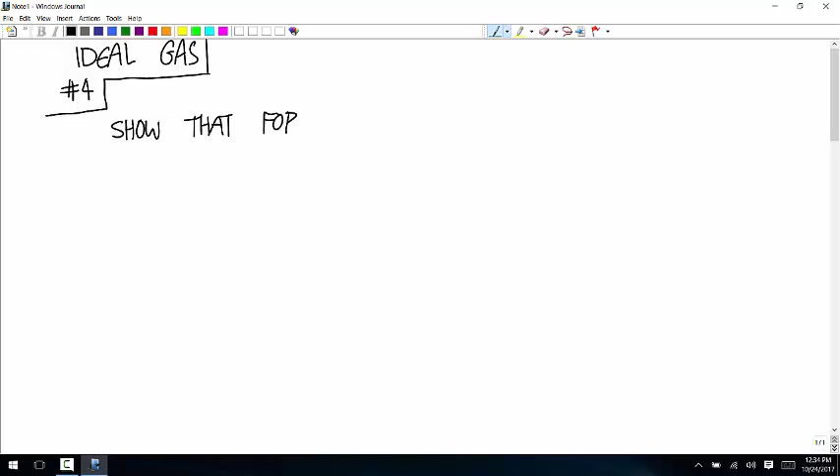Show that for an ideal gas, CP over CV is 5/3. And then how does that compare for an incompressible material? Well, for an incompressible material, they're the same, so that ratio would be 1.

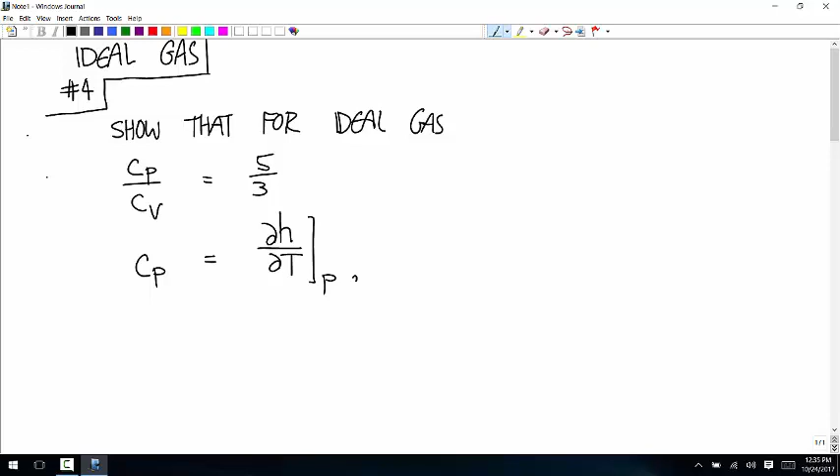Okay, so for this one, what do we have? CP is equal to the partial of the enthalpy with respect to temperature, holding pressure constant. Is that right? CP, yeah. And CV is dU/dT holding volume constant.

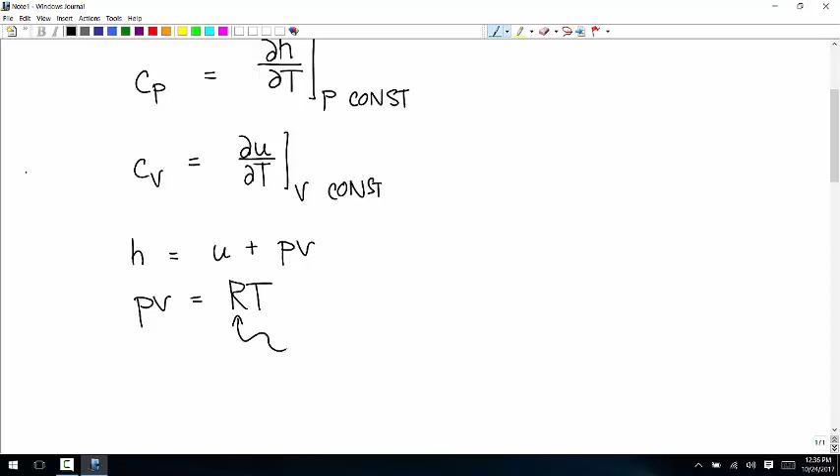H is equal to internal energy plus P times specific volume. And we know it's an ideal gas, so PV equals RT, where this R is specific to the gas, not the universal one.

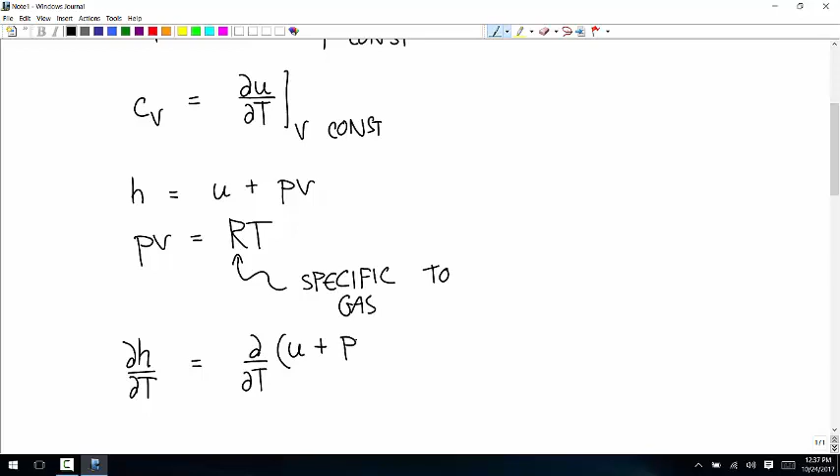Okay, so U... let's think of... so dH/dT is equal to the partial with respect to temperature of U plus PV, this is for pressure constant.

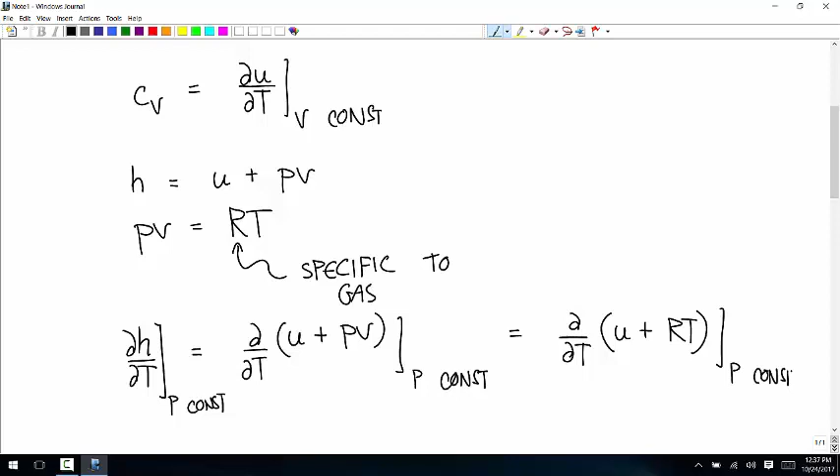From the ideal gas law, PV is equal to RT, so we can write that as the partial with respect to temperature of U plus RT, holding pressure constant. That's equal to the partial of U with respect to temperature for P constant, plus R.

For the ideal gas model, the assumption is that internal energy is only a function of temperature, is that right? Can someone check? I don't know if I have that with me here. Yeah, internal energy is a function of temperature.

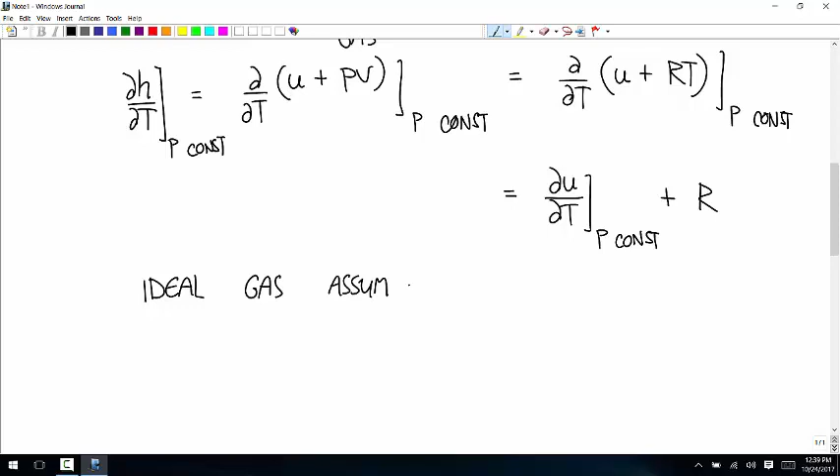Okay, so here are the ideal gas assumptions. First, PV equals RT. Second, specific internal energy is just a function of temperature. And third, H can be approximated as internal energy, which is a function of temperature, plus RT.

Okay, well that was sort of what we were getting at there. Using the fact that U is just a function of temperature, then we don't have to worry about holding pressure constant versus holding volume constant, since it's not a function of those. So this tells us that...

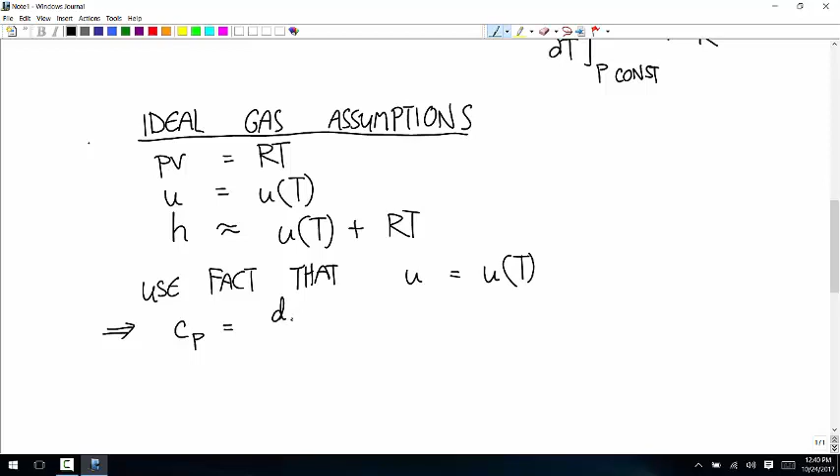Cp is just equal to the total derivative of H with respect to temperature. This is a restart, by the way, I don't know if you could tell that. These are notes to self, only. Okay.

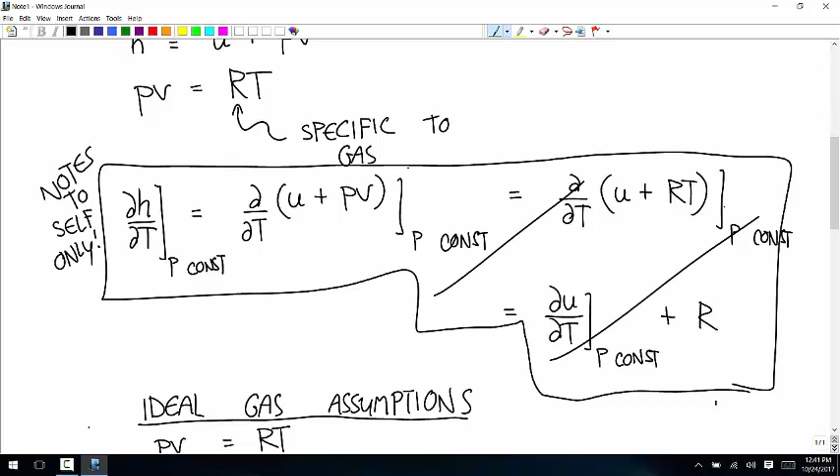So Cp is this, and Cv is the total derivative of U with respect to temperature. This is the total derivative with respect to temperature of H, equal to U plus RT. So take that derivative and you get dU/dT plus R.

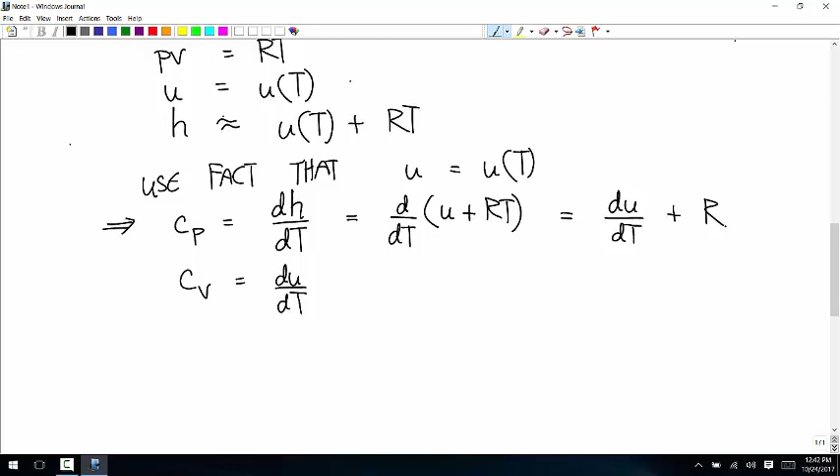And we're looking for Cp over Cv. So we have dU/dT plus R, divided by dU/dT, and that gives us 1 plus R over dU/dT, which is Cv. So we got this, and that's also equal to this.

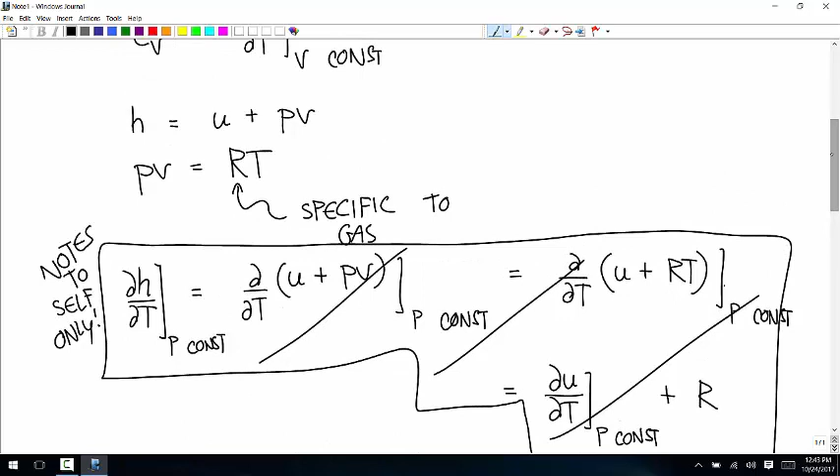Okay, so we want to figure out that R over Cv, or R over dU/dT, is equal to 2/5. Anybody remember how to do this? So let's see, R is equal to PV over T.

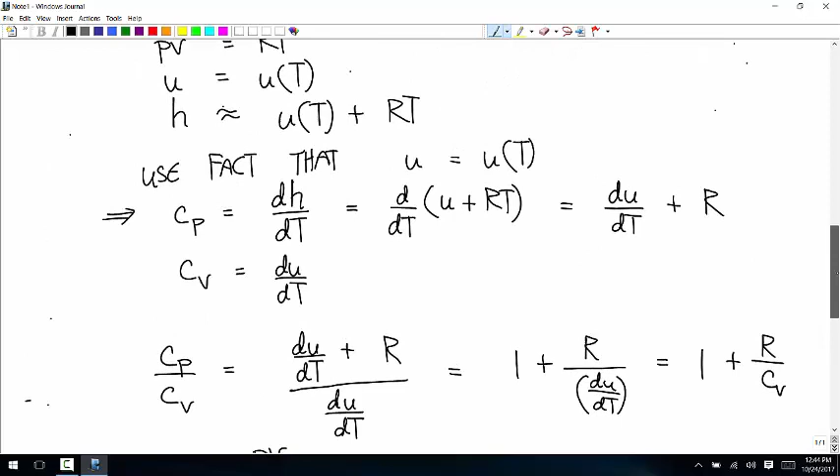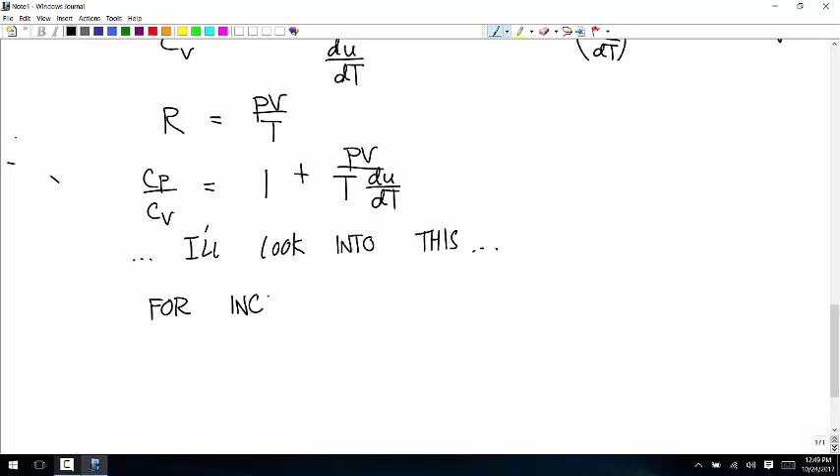So we have 1 plus PV over T, dU/dT. But it definitely did say that for an incompressible material, a liquid or solid you're treating as incompressible, Cp is just equal to Cv, and we just call it the specific heat.

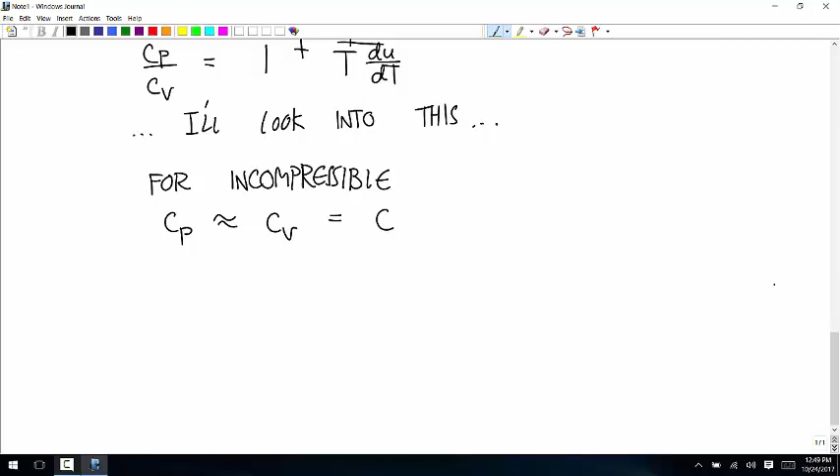All right, so what we've been talking about is control volume stuff, the first law of thermodynamics for control volumes.

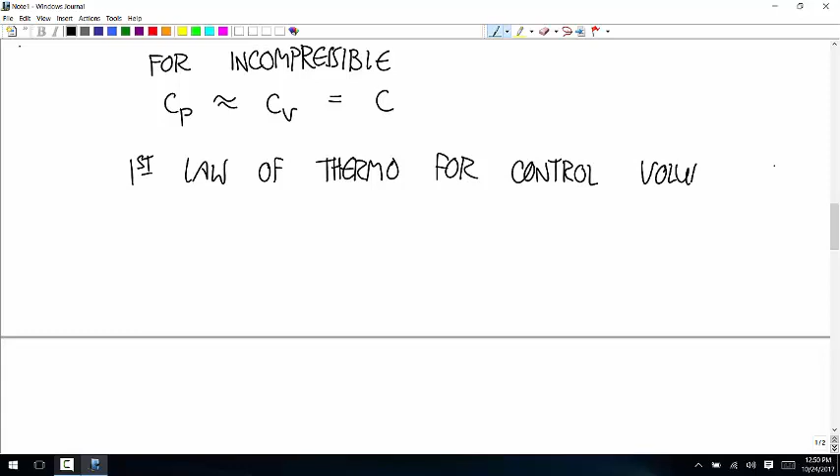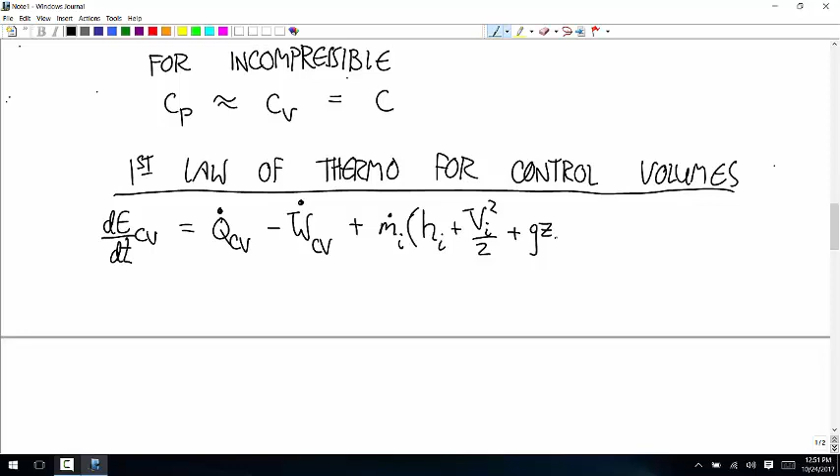The full general equation says the change in the energy of a material in the control volume is equal to the rate that heat enters the control volume, minus the work done on the surroundings by the control volume, plus the rate of mass flow through the inlet times the quantity enthalpy at the inlet plus speed squared over 2 at the inlet plus G times height at the inlet, minus the rate of mass flow at the exit times the quantity enthalpy at the exit plus speed at the exit squared over 2 plus GZ at the exit.

And then depending on what kind of device or control volume you're looking at, you eliminate some of these. So the first thing we talked about was nozzles and diffusers.

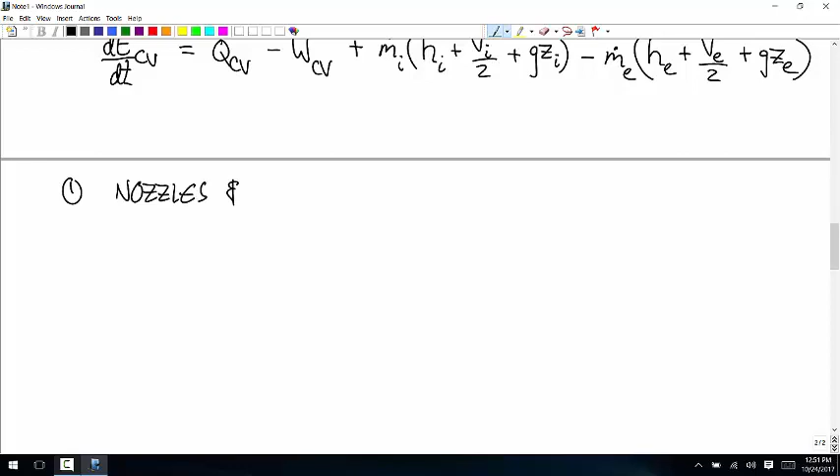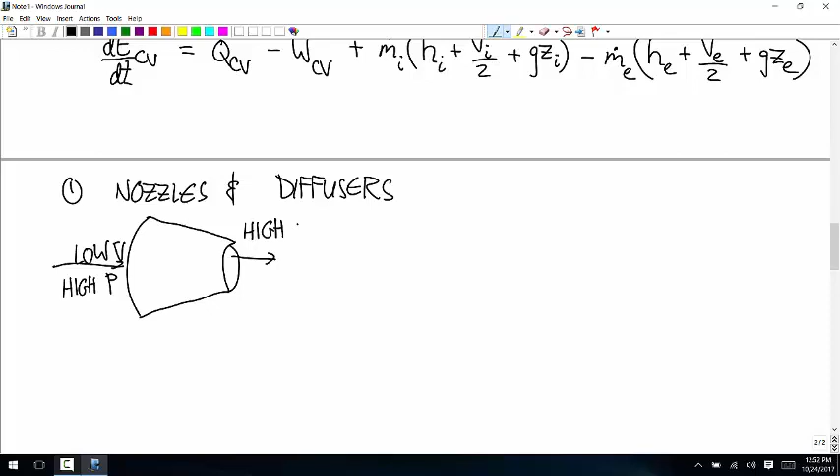A nozzle speeds up the flow and decreases the pressure. So at the inlet you have low speed and high pressure, and at the outlet you have high speed and low pressure. A diffuser is the opposite: at the inlet you have high speed and low pressure, at the outlet you have low speed and high pressure.

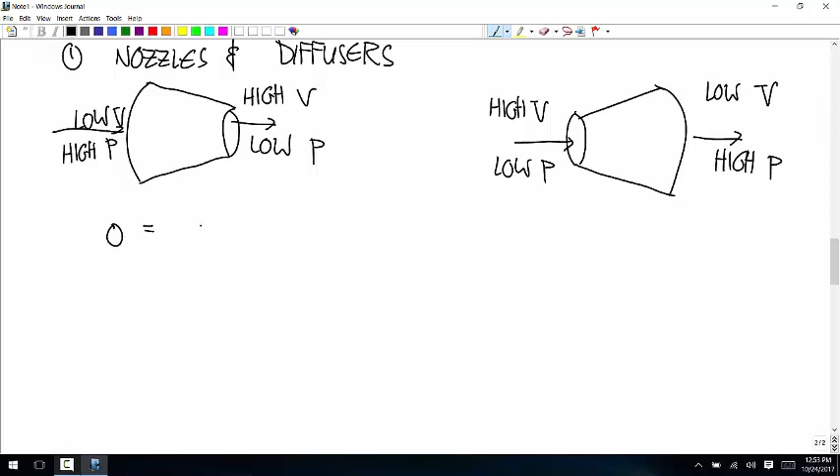And the simplified form for that one said, you can write it a couple of ways: zero is equal to the enthalpy at position 1, or the inlet, minus the enthalpy at the exit, plus the speed at the inlet squared over 2, minus the speed at the exit squared over 2. So you can think of nozzles and diffusers as exchanging enthalpy for speed and pressure.

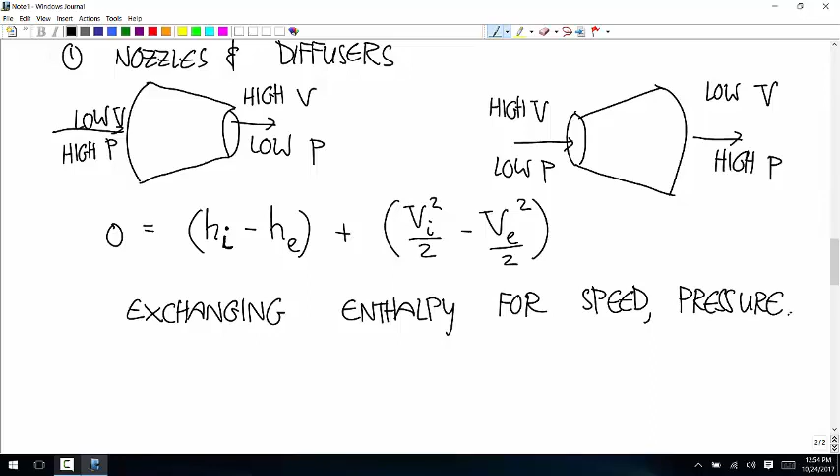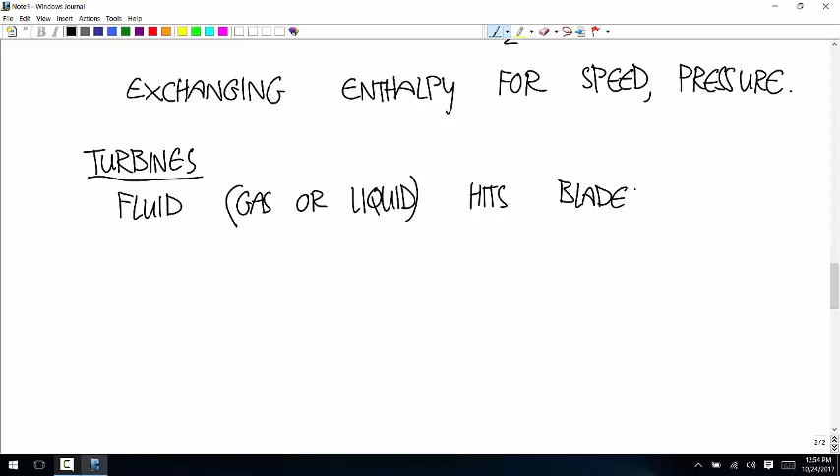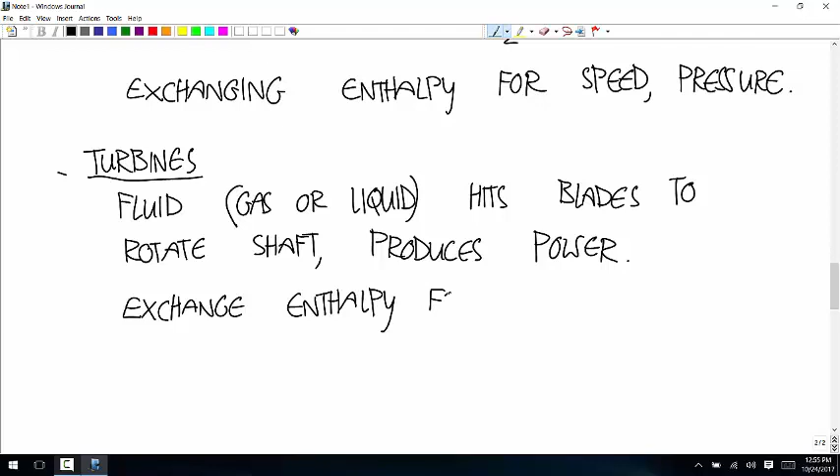So the next one, we did an example last time with that. The next one is turbines. In a turbine, a fluid, a gas or a liquid, hits blades to rotate a shaft, and that produces power. You could use it to do physical work, or more often it's used to produce electrical work through a magnetic field, and that rotating thing produces electricity. The idea here is that you exchange enthalpy for electric power, or it could be mechanical power.

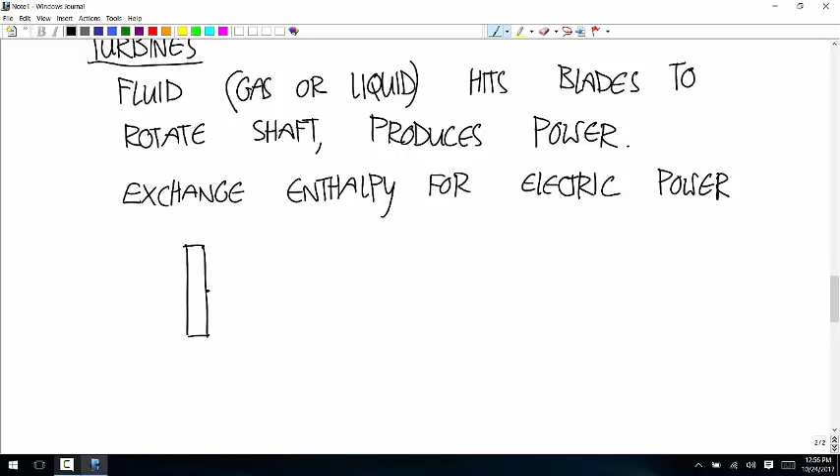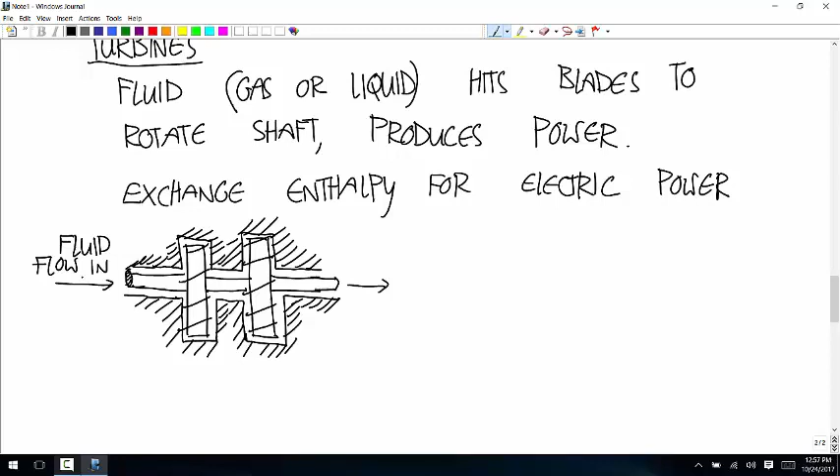So let's think about the simplifications here. Here's a drawing of what it might look like. So you have a shaft. In this case, we have 2 turbine blades. Here are the blades. These are inside a tunnel. This is a solid shaft. All of this shaded region is solid. You have a flow of steam or whatever material this way, and it leaves this way. When that fluid hits these blades, it turns that shaft, and that's how the power is created.

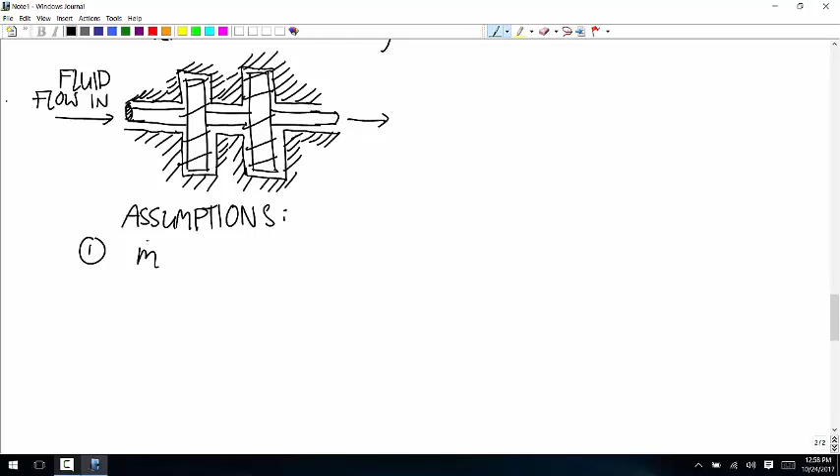So here are the assumptions that we're usually going to make with turbines. First, there's no material stored in our control volume, so whatever the mass flow is coming in is the same as the mass flow going out. In other words, the rate of mass flow at the inlet is equal to the rate of mass flow at the exit, and we'll just call that m dot. Second, steady state, so the rate of change of energy in the control volume is 0.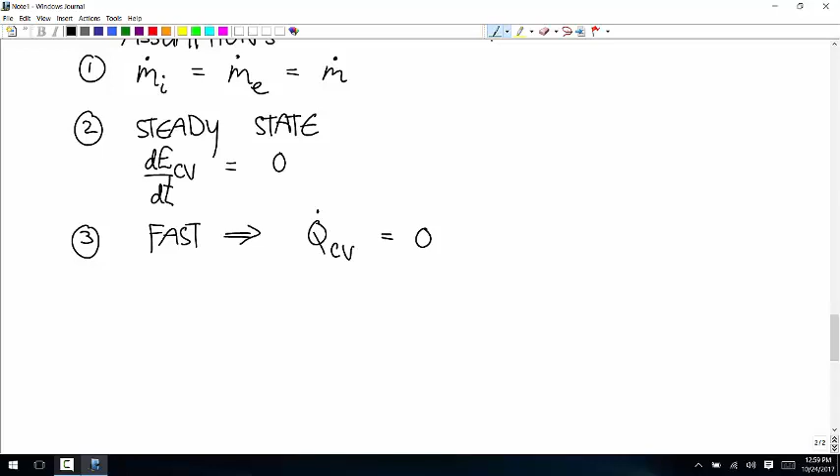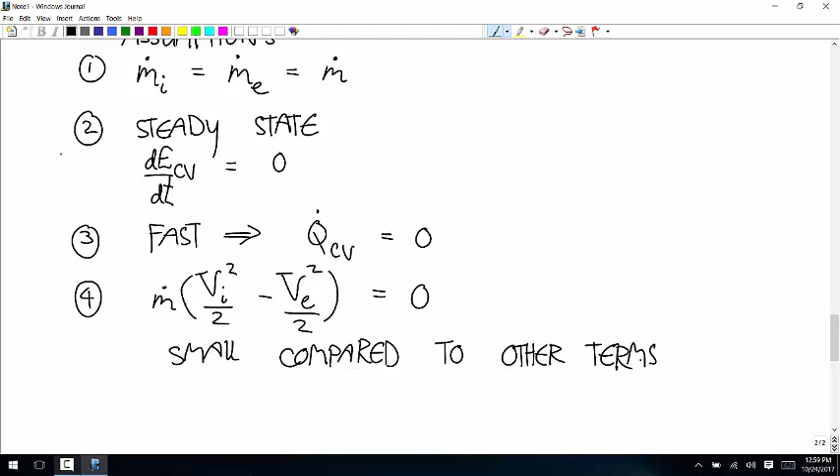Fluid, usually to turn these blades, needs to move through the control volume pretty quickly, so we're usually going to assume that there's no heat transfer from the control volume to the surroundings. This one is a little surprising, but we're going to do an example that shows a typical case of how this works. The kinetic energy contribution to the first law of thermodynamics is small, so that term is treated as 0 - it's always going to be small compared to the other terms. And then also the change in height of the fluid is not going to contribute much to this, so we'll assume that m dot times the quantity gz at the inlet minus gz at the exit is equal to 0, again small compared to the other terms.

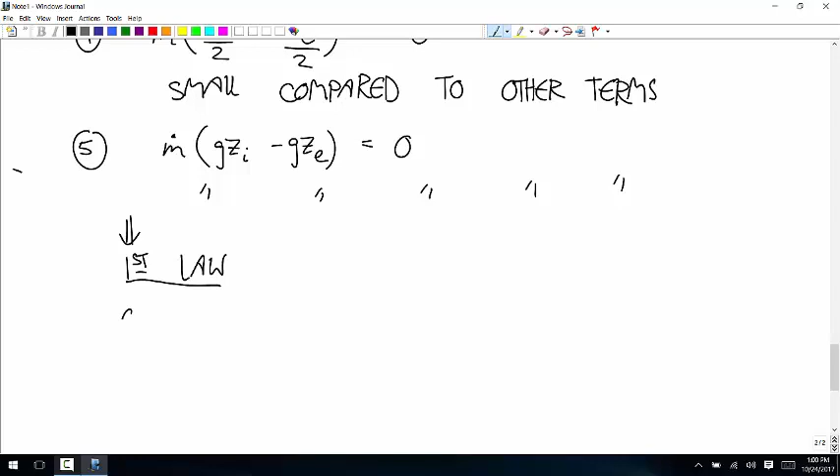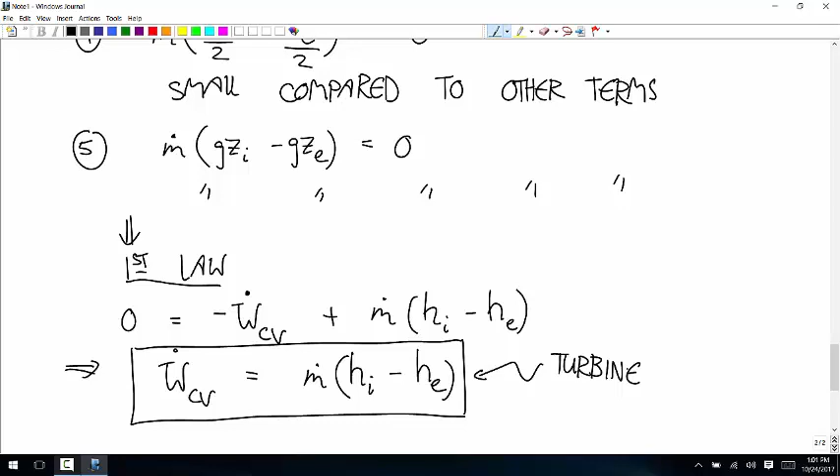And so the first law with these assumptions says 0 is equal to negative of the work done on the surroundings by the control volume plus m dot times the quantity enthalpy at the inlet minus enthalpy at the exit. You can rewrite it as the work done by the material in the control volume is equal to m dot times enthalpy at the inlet minus enthalpy at the exit. So this is for a turbine: that W dot is the work that is given away by the control volume through electric power, that's electric power that's created.

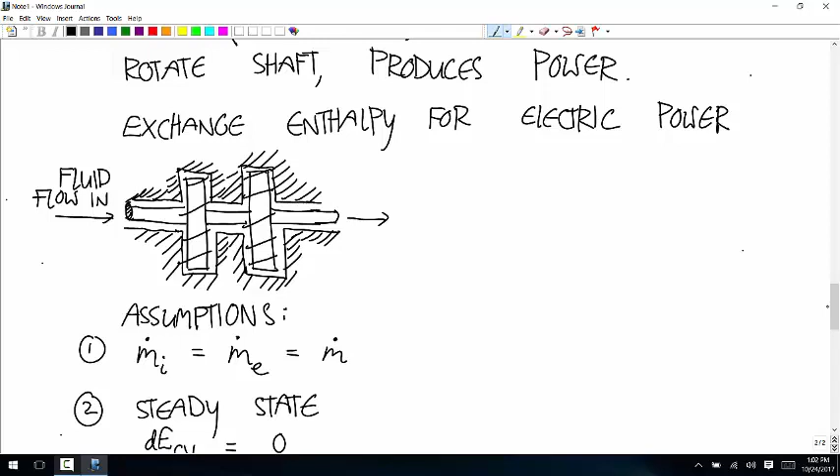So there is going to be a change in speed from one side to the other side normally, and we'll see that in this example. But that change in speed just isn't going to be a very big source of change in energy.

Okay, so let's say that this is a steam turbine, so that means that the material moving through the turbine is steam. The rate of mass flow is 4,600 kilograms per hour.

At the inlet, we know that the pressure is equal to 60 bar. The temperature is 400 degrees Celsius. And the speed is equal to 10 meters per second.

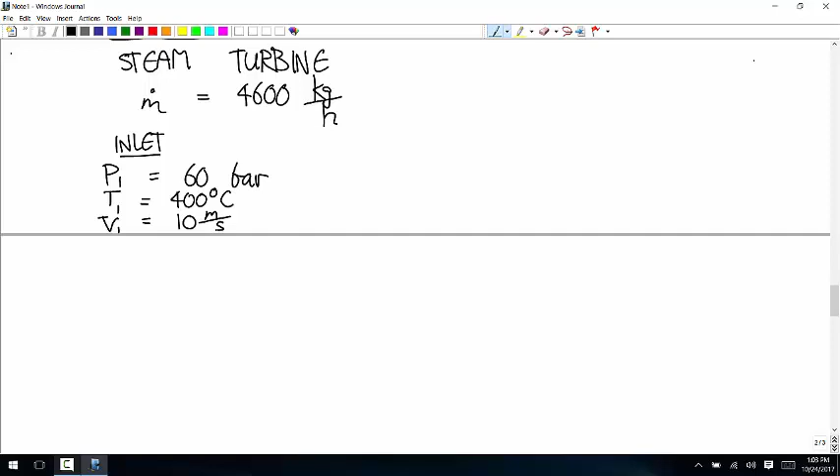And then at the exit, the pressure is 0.1 bar. The speed is 30 meters per second. And the quality of the saturated steam liquid is 0.9. So it's almost all steam, but a little bit of it has condensed into a liquid.

And we want to know, first, using the turbine assumptions, what's the power generated?

And second, now this is sort of a realistic amount of power that you'd actually get out of it. Let's say that we get true power generation of 1,000 kilowatts.

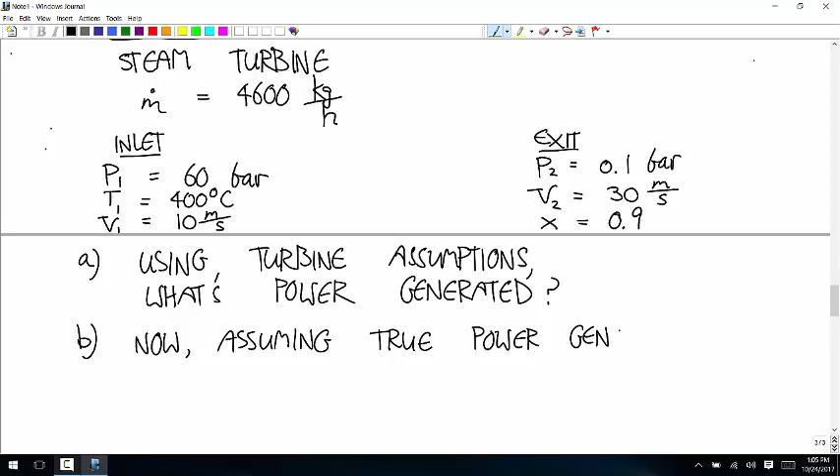What's the rate of energy added to the control volume by kinetic energy?

And then last, with that same assumption, so assuming that true power generation is 1,000 kilowatts, what's the rate of heat loss?

Okay, so for part A, we're going to go to that fully simplified form that we're going to use for turbines. And then for B and C, we're going to go back to a more complete first law of thermodynamics using some of those other values that are given but not used in part A. We'll go back and use those in B and C to figure out how much energy you could expect to lose through heat, and how much you could expect to gain or lose through kinetic energy.

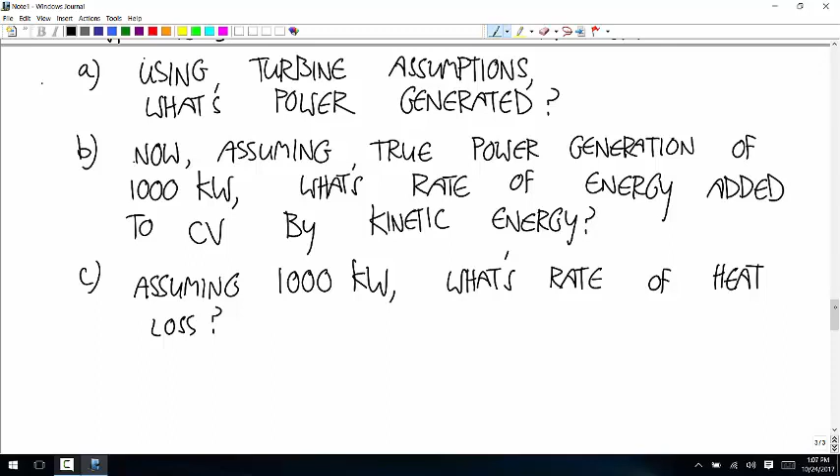What do you think about? Look at the properties at the inlet and the exit. There's a much higher pressure at the inlet than the exit. Do you think that's always the case, or is that just this turbine, or what do you think? We always need it because that difference in pressure is what gets the gas to move in the direction we want through the turbine.

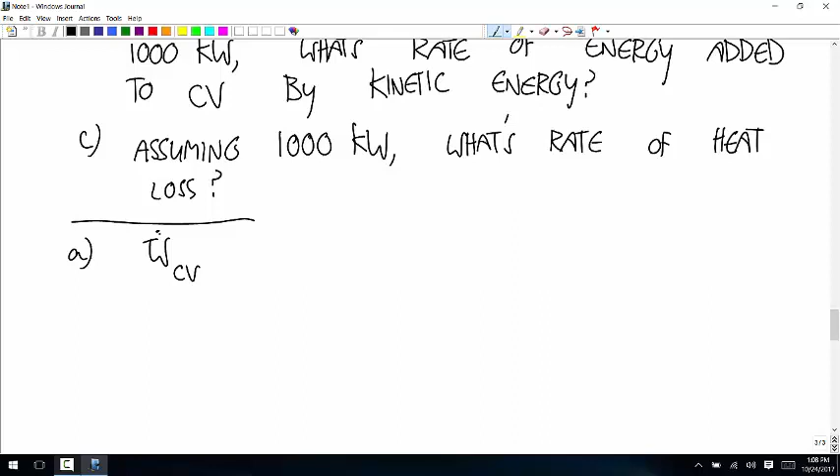Okay, so for part A, we're going to use this equation that says the rate of work done by the control volume is equal to the mass flow rate times the enthalpy at the inlet minus the enthalpy at the exit. We can use the steam table.

And it says that, okay so we know that at P1 of 60 bar and temperature 1 of 400 degrees Celsius, specific enthalpy is 3,177.2 kilojoules per kilogram.

And now for the second, at the exit, we have to use the information about the quality, so it's going to be a little more complicated. At this second pressure of 0.1 bar, okay, so first of all, it doesn't give the temperature. How do we get around the fact that this problem doesn't give the temperature? Or how do we know what to do there?

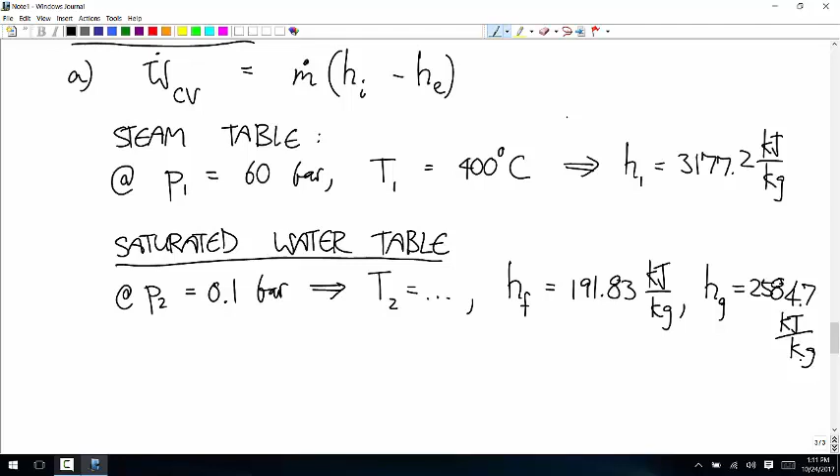So based on that, how do we figure out the enthalpy of the mixture that we have? Well, we have 90% gas, 10% liquid. So H2 is equal to 0.9 times 2584.7 plus the quality, or 1 minus the quality, times the enthalpy for the liquid, 191.83.

And I think that gives you 2345.4.

M dot is 4,600 kilograms per hour. All of our units are in seconds, kilograms, joules. So 4,600 kilograms per hour is equal to 1.27 repeating kilograms per second.

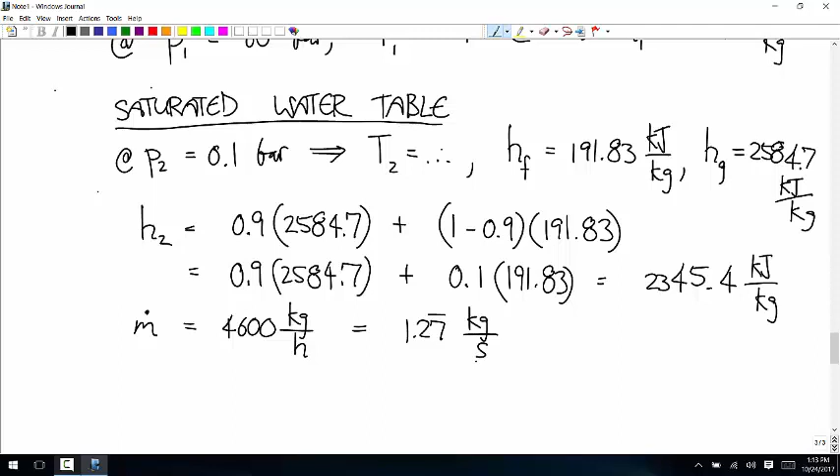Plug this now all into the first law, and you get that W dot for the control volume is equal to 1.27 repeating times the quantity 3177.2 minus 2345.4. And so you get 1,062.9 kilowatts.

Okay, so if there was perfect efficiency, you could transfer all of the change in enthalpy directly into electrical energy. That's how much energy you'd produce.

We didn't use all the values that were given in this problem, so now we're going to go back and use some of those other values to come up with a typical heat loss, and a typical energy loss due to change in kinetic energy, and we'll see how this estimate compares to a more realistic value.

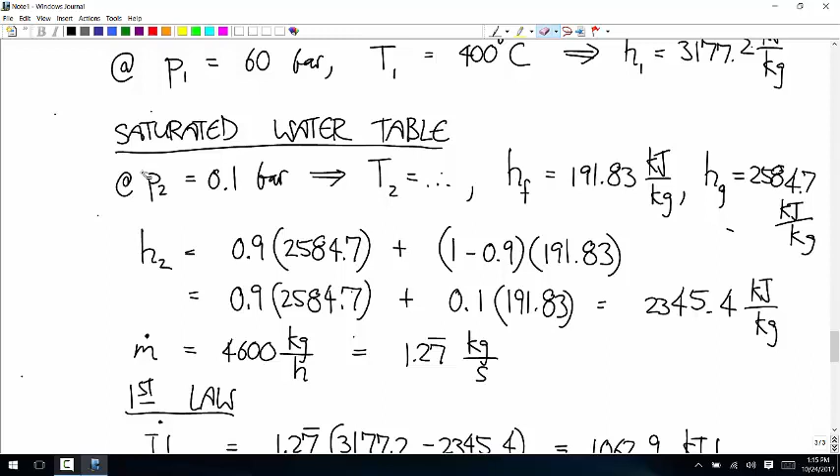Okay, so for part B now, we want to figure out the term m dot times the speed at the inlet squared over 2 minus the speed at the exit squared over 2. So let's figure that out.

We can do that just using the information we're given about the speeds. So using the fact that at the inlet, speed 1 is 10 meters per second, and at the exit, 30 meters per second.

So we know that the rate of mass flow is 1.27 repeating, in kilograms per second. And so m dot times v at the inlet squared over 2 minus v at the exit squared over 2 is equal to 1.27 repeating times 10 squared over 2 minus 30 squared over 2. And you get a value of about negative 508.

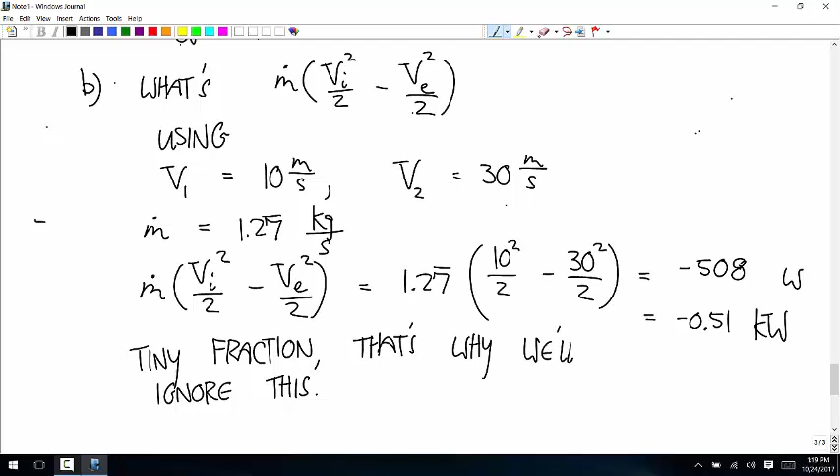And then for C, now we want to, at the same state, figure out what the heat loss would be. We were just calculating the contribution to the first law that comes from changes in kinetic energy.

And so now we're going to go back to the first law. So now what we're trying to find for part C is how much heat is lost, how much energy is lost through heat. Basically, we made the assumption that no energy was lost through heat, no energy was lost through kinetic energy changes, and now we're taking additional hypothetical measurements, but ones supposed to be in the ballpark of something realistic, to figure out how reasonable these assumptions were.

So the first law now becomes, if we're— yes? We haven't needed it yet, but now we're going to need it.

So in part A, we assumed no heat lost, assumed no significant kinetic energy changes, and we calculated using those big assumptions what electrical power would be generated. And now we're saying don't throw those away, and based on some additional measurements, let's figure out the amount of energy that is lost through kinetic energy, the amount of energy that is lost through heat.

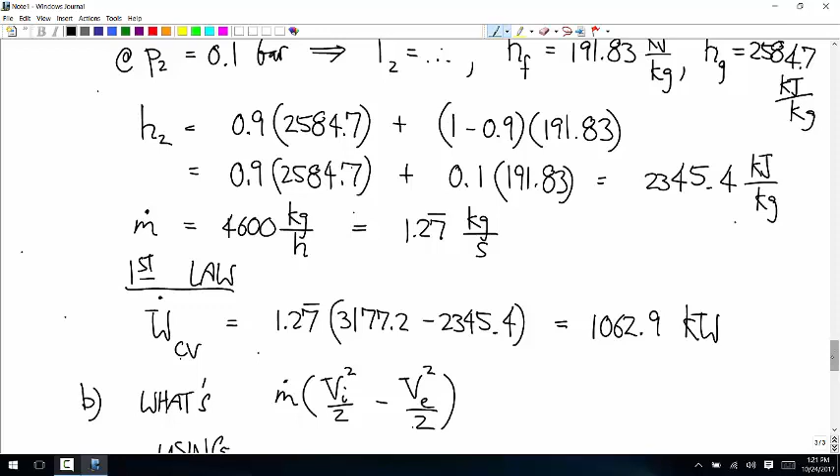Okay, so we calculated here that in part A, the power generation was 1,062. A more realistic amount of power generation for all of these properties would be 1,000. So you lose 62.9 kilowatts. So we're just going to plug all this stuff into the first law and calculate the different parts of it.

So the first law now—we still don't have any change in energy in the control volume. We are dealing with heat now. And now we're making the assumption that the electric power that's produced is 1,000.

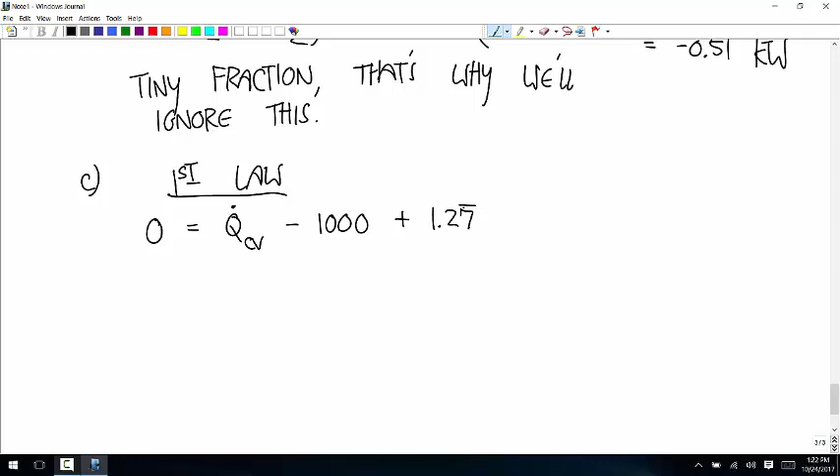So we'll subtract a positive amount of work done on the surroundings. And then we have 1.27 repeating times h at the inlet plus speed at the inlet squared over 2. We're still throwing away the height change. And then minus 1.27 repeating times the h at the exit plus the speed at the exit squared over 2.

So 0 is equal to Q dot in the control volume minus 1,000 plus 1.27 repeating times... we still know those enthalpies from before, nothing's changed about any of the values that we used before. And then we have plus 1.27 repeating times the speed at the inlet squared over 2 minus the speed at the exit squared over 2.

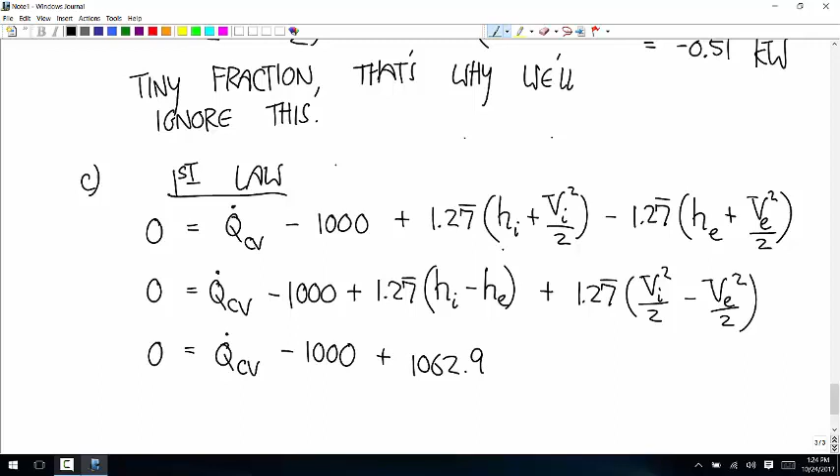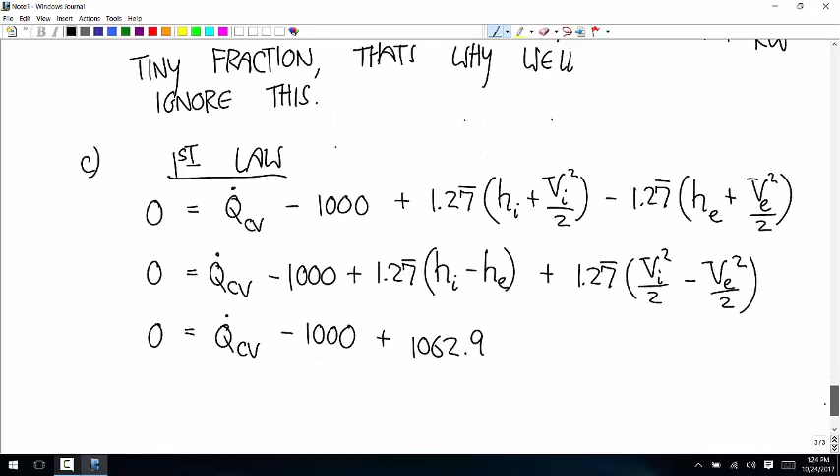And now we can just plug in values. So 0 is equal to Q dot for the control volume minus 1,000. We calculated before that 1.27 times that difference in enthalpies is 1062.9, this is in kilowatts. And we calculated that this term, m dot times the quantity vi squared over 2 minus v exit squared over 2, is negative 0.51.

And so Q for the control volume, Q dot, is equal to 1,000 minus 1062.9 plus 0.51. And what do you get for that? Something negative.

Does it make sense that we would get a negative answer for Q dot? Yeah, because Q or Q dot is positive if heat is being added from the surroundings to the control volume. Here we have heat being lost from the control volume to the surroundings, so that should be negative. Yeah, that's kilowatts. Thanks. Any questions about that?

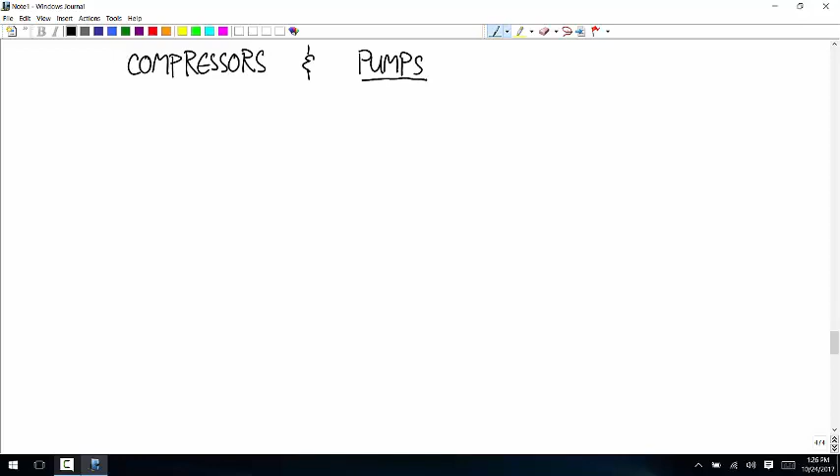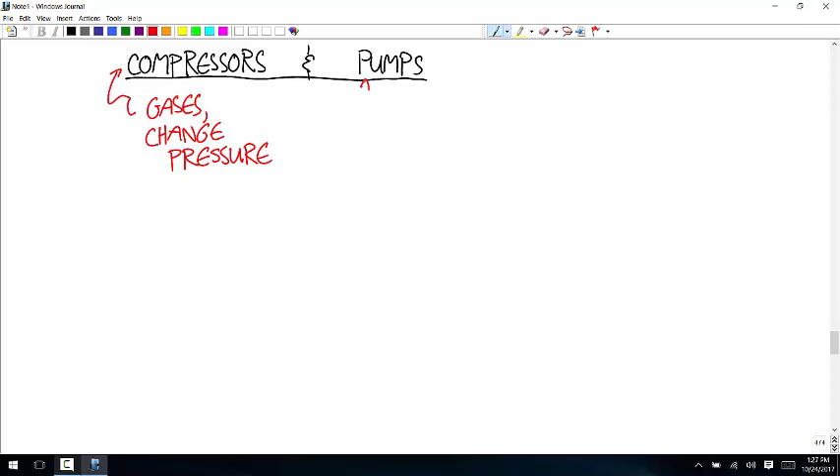Compressors are when you're talking about gases, and what you're trying to do in a compressor is change the pressure. So you always want the pressure to be higher at the exit than it is at the inlet. And a pump is for... you want to, usually you're using pumps to change the height. I guess you could use it to change the pressure.

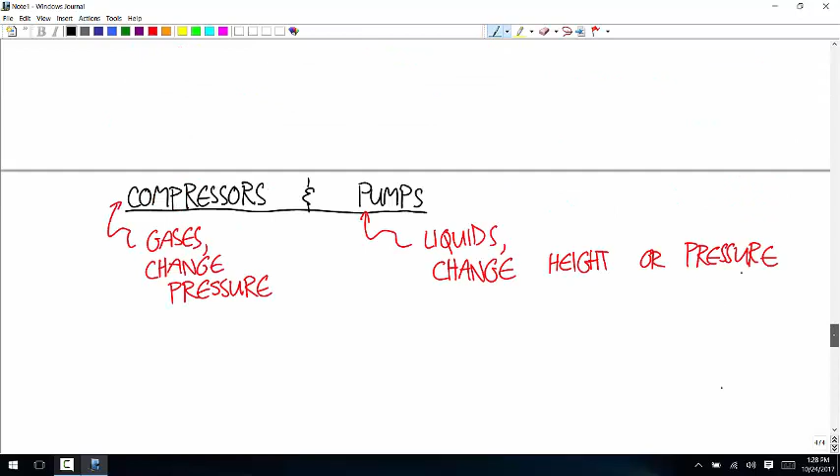And for nozzles and diffusers, we came up with one final simplified equation that related enthalpy change to speed change. And for turbines, we came up with one simplified equation that related enthalpy change to electric energy, change in power generation. For these, every time we use them, we're going to make some different assumptions. There are going to be some that are the same always, so we're not going to come up with a single simplified equation. It's going to be sort of a case-by-case thing.

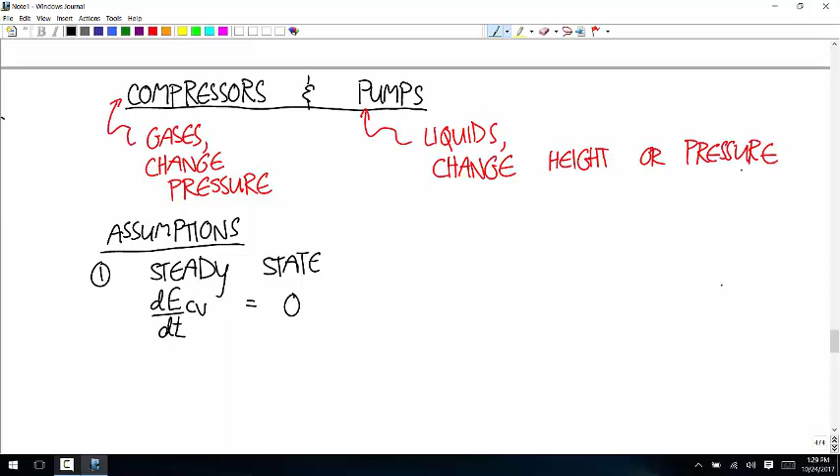So here are the things that we're often going to see, for assumptions. First, it's almost always going to be in steady state. I think probably every problem we do, it's going to be in steady state, so the time derivative of the energy in the control volume is equal to 0. It's moving pretty quickly, so we're usually going to assume that there's no rate of heat transfer between the control volume and the surroundings. Because it's steady state, there's no mass stored inside the control volume, so the rate of mass flow at the inlet is equal to the rate of mass flow at the exit is equal to m dot.

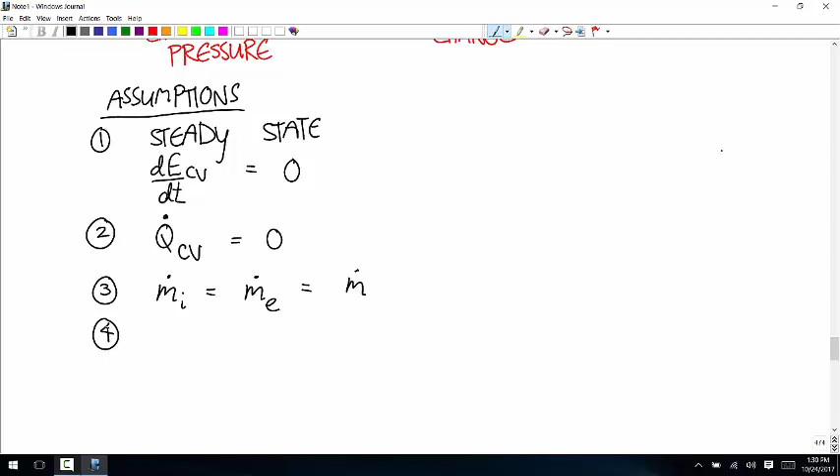And now we get into some that are dependent on the application. For compressors, we can assume that the change in potential energy is small. So m dot times the quantity g z at the inlet minus g z at the exit is equal to 0. With pumps, that's not always the case.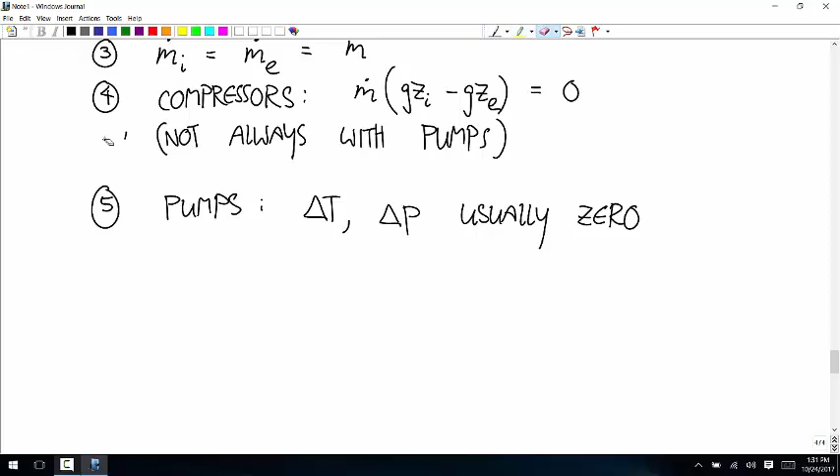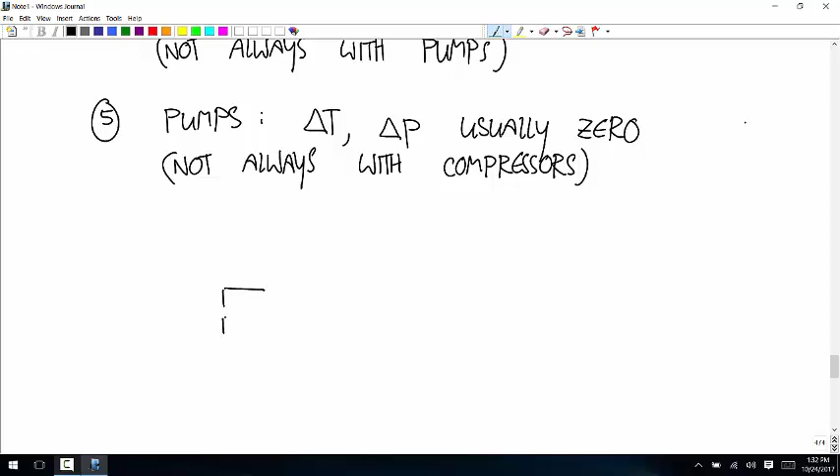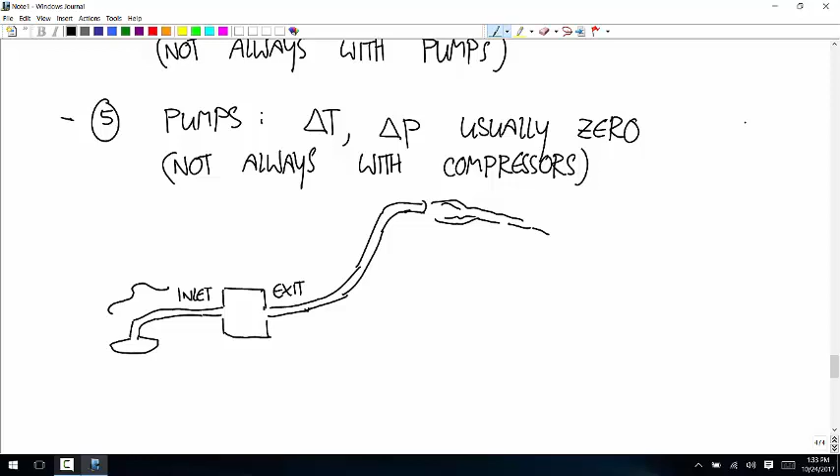So let me elaborate on this one a little. So if you have a pump, here's what the little pump that we use looks like. You've got this thing, it sucks up the water here, and then here's the inlet, here's the exit, and you're trying to get this up to a different height, or you're trying to overcome friction to spray this water out of a hose somewhere far away. Okay, well, when it says for a pump, usually the change in pressure is going to be zero. That seems a little strange if you think about the inlet being here and the exit being here, because obviously you need to develop a high pressure in order to shoot this liquid all the way out there, up high or whatever. But if you think of that control volume as being everything from the start over here, so now think of this as the inlet, and that is the exit.

Right here you have atmospheric pressure. So you're doing all these calculations not really where the physical pump machinery starts, but where you're picking up the liquid and where you're dropping off the liquid. Any questions about that?

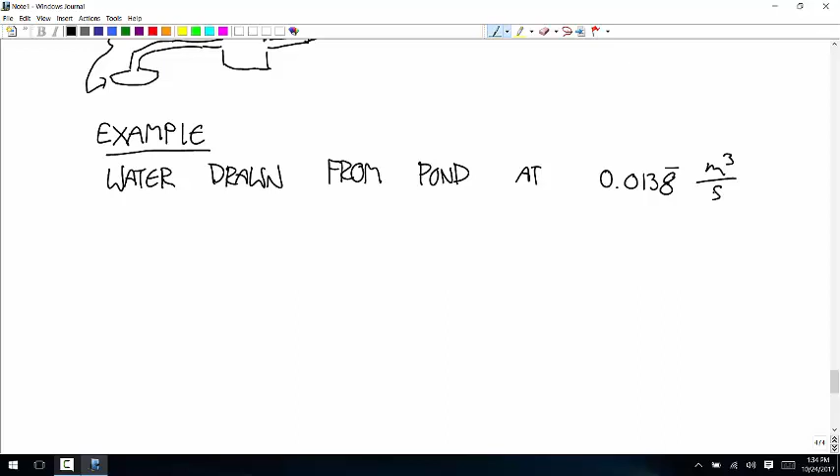Okay, so let's do a problem with a pump. Let's say water is drawn from a pond at a rate of 0.0138 repeating meters cubed per second. Okay, I got that crazy number because I think I converted or something. And we want this water to be lifted a height of 10 meters. So what's the power required?

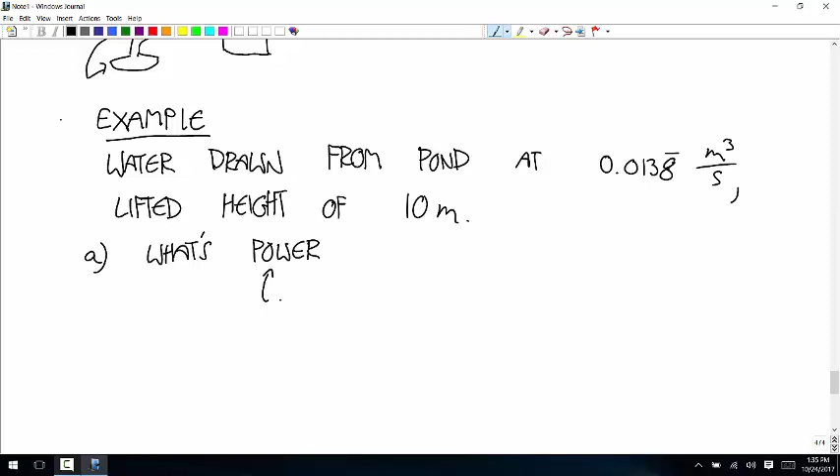That's electric power. Assuming that there's no heat loss.

Okay, well, what assumptions can we make? We're going to assume that it's steady state, so dE/dt for the control volume is 0. We're going to assume that there's no heat loss. We're going to assume that the rate of mass flow is the same all the way through.

And now what about a change in potential energy? That's one we almost always, I think always, up until now we've thrown that out, but now we're talking about, remember, if we think of our exit at the end of the hose, that's 10 meters up in the air. And so that's going to be important in this one. So we're not going to make that assumption.

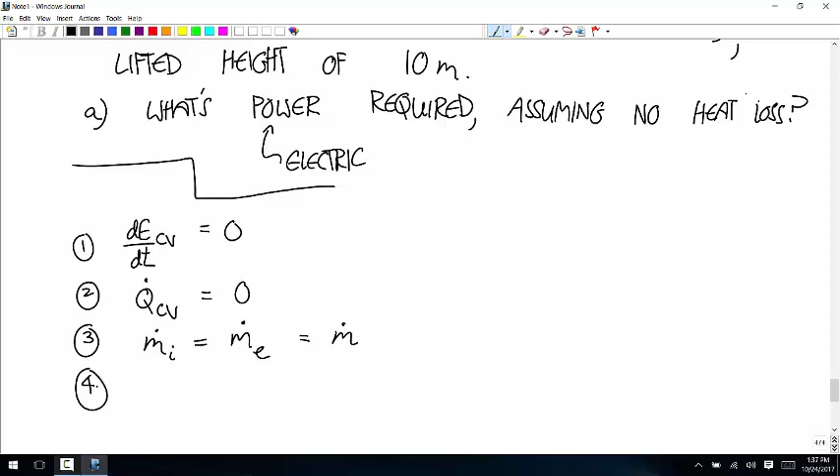We are going to assume that the temperature is constant. And we are going to assume that there's no change in pressure. So there is change in potential energy. We can't get rid of that one.

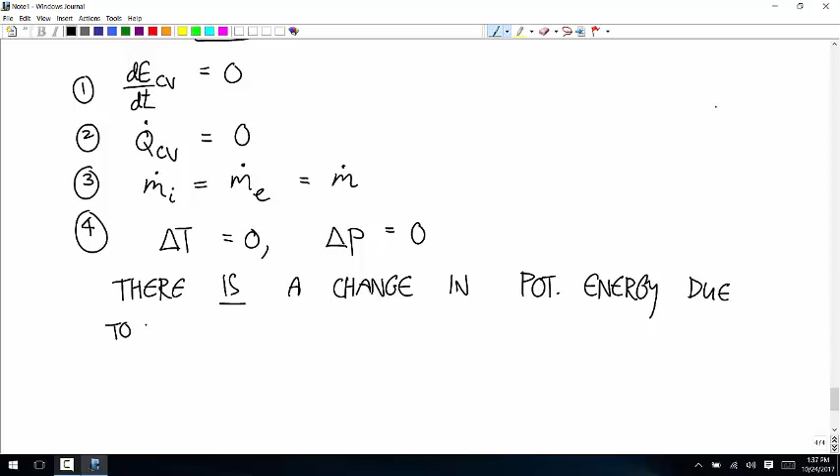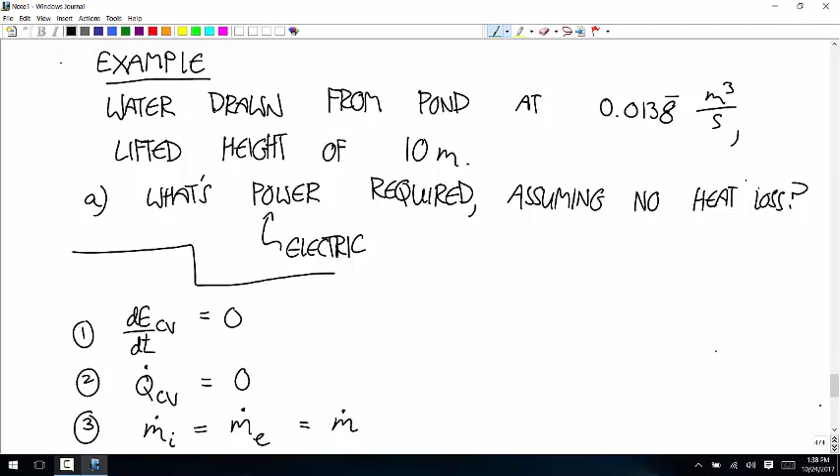More? The temperature is constant, so we're going to assume that the density is the same. So rho is constant, and we'll just call that 1,000 kilograms per cubic meter.

M dot is equal to, so we have volume flow. The density of water is 1,000 kilograms per cubic meter. And if you multiply that by 0.0138 repeating meters cubed per second, you get that M dot is equal to 13.8 repeating kilograms per second.

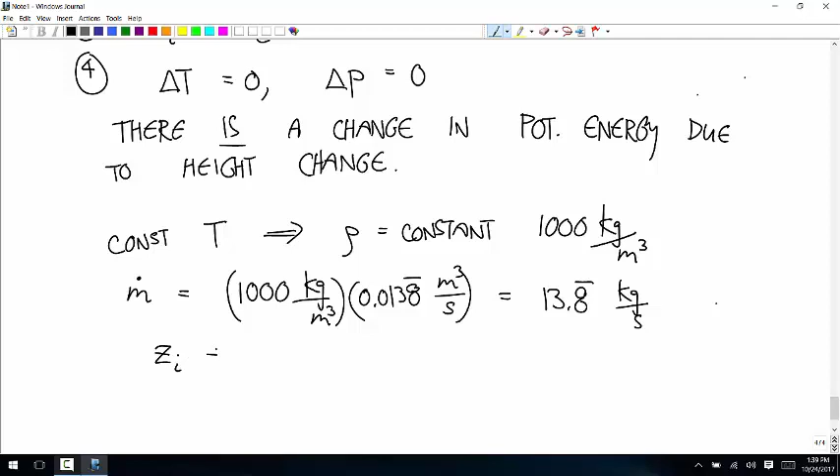And then Z at the inlet, the height at the inlet, we'll call that zero height. And the height at the exit is 10 meters higher, so we'll call that positive 10 meters.

So now the first law says 0 is equal to 0 minus W dot for the control volume plus M dot times the quantity enthalpy at the inlet plus G Z at the inlet, and then minus M dot times the quantity enthalpy at the exit plus G Z at the exit.

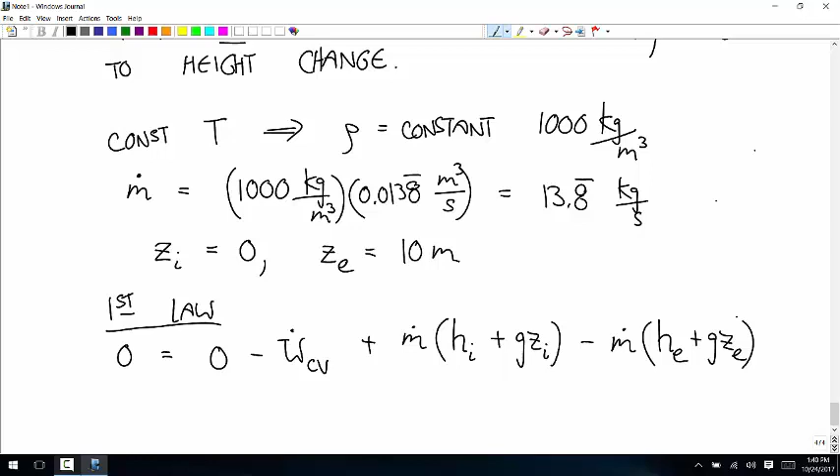And now we can fill some of this stuff in. So W dot for the control volume is equal to...

And so that's equal to 13.8 repeating times the enthalpy. Now, the enthalpy is, so specific enthalpy is internal energy plus PV.

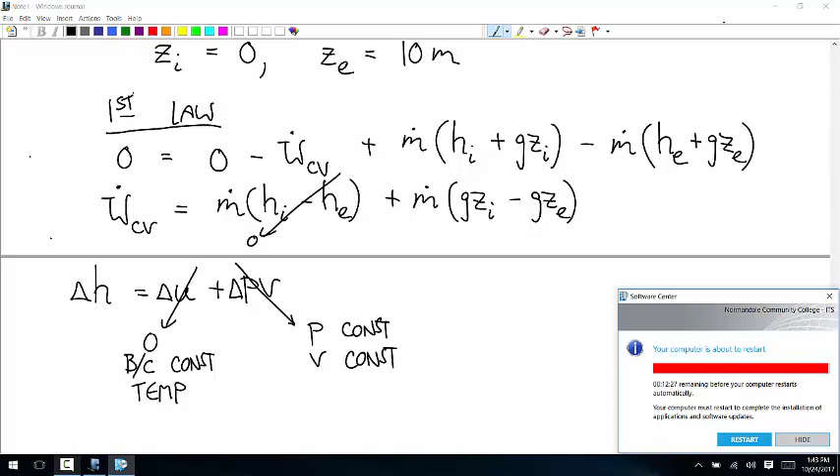And we're just left with, all I need to do is... damn it. Okay, hold on. I can do this. New page.

Does it make sense in this case that W dot would be negative? Yes. In the case of the turbine, we were using changes in energy due to the properties in that control volume to calculate the work being done on the surroundings. This is the surroundings putting energy into the pump so that we can change the potential energy of the liquid. Any questions?